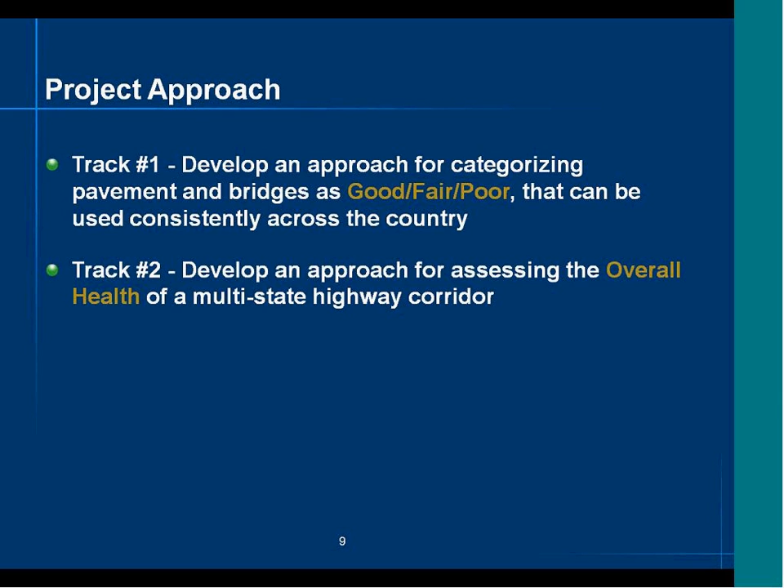Phases of the project. The first one was a literature review and to develop a methodology. The second one, which you're going to hear more about from Jonathan in a minute, is we conducted a pilot of the methodology along a three-state corridor. And then, as Steve mentioned, we presented the findings and recommendations at a national workshop, and the final project documentation.

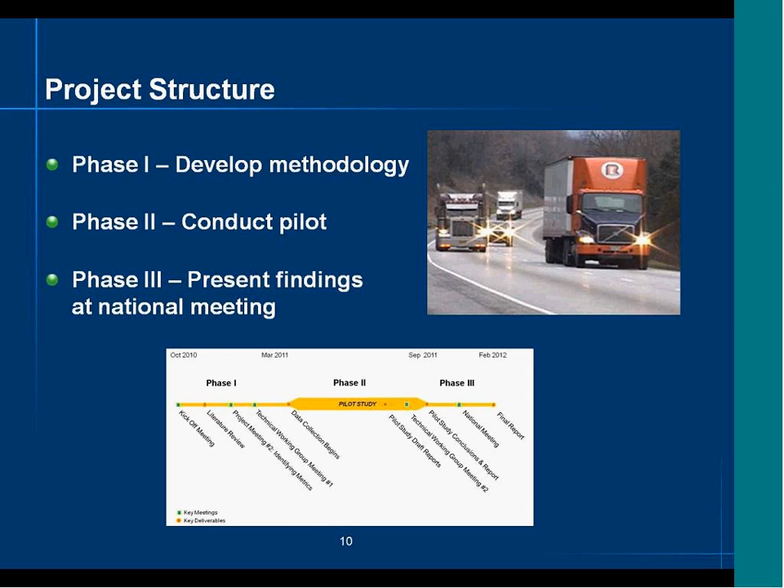With the project, we had a technical working group that met a few times and provided feedback and guidance to the work. We had representatives from a number of DOTs and AASHTO. And at the national meeting, which was held at the AASHTO annual meeting in Detroit last year, there were about 33 state DOTs there in addition to FHWA and AASHTO. Later on, we'll give you the documentation for this project, and on FHWA's website you can find the proceedings from that national meeting.

Track number one was to define qualitative definitions for good, fair, poor. So let's start by just describing in words what we mean by good, fair, and poor. And the second step was, after we had those definitions, let's develop performance measures that we can use to place the pavements and the bridges into those buckets.

There are a couple major benefits of this approach. One of them is, if you're just talking about three big buckets, good, fair, and poor, it helps to alleviate some of the concerns and discrepancies in how data is collected, compiled, analyzed, etc. A good pavement should be a good pavement, regardless of some inconsistencies in how some of the data items are collected.

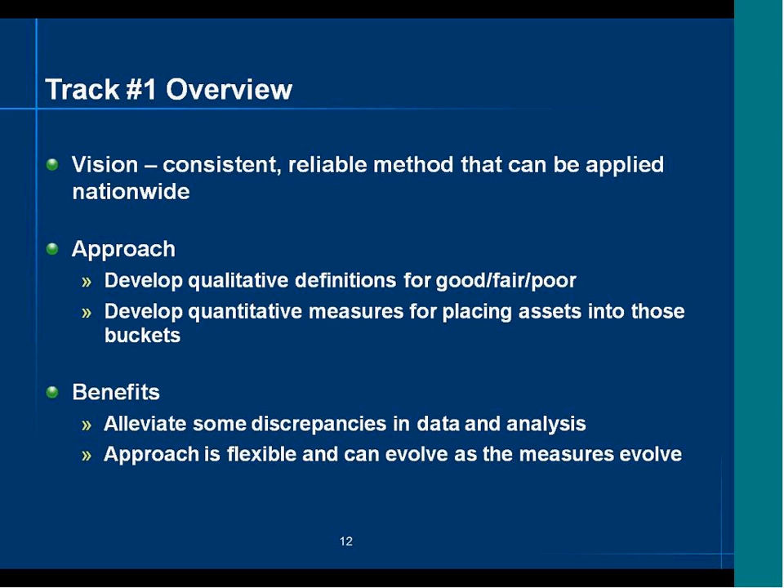So the table shows you the results of that step. This is basically, in words, what we mean by good, fair, and poor condition. There's 2 columns. One of them just talks about what the physical condition looks like. And so, for example, a good pavement is free of significant defects. And then the second column talks about what type of work is generally required for an asset in that condition.

I'll give you a minute to read through some of this, but it's important to remember that the audience for this table is us. It's technical transportation practitioners. There's been an understanding that if we are going to start to communicate this to the public or to elected officials, then we would need to revisit these definitions and seek more in terms that they can easily relate to.

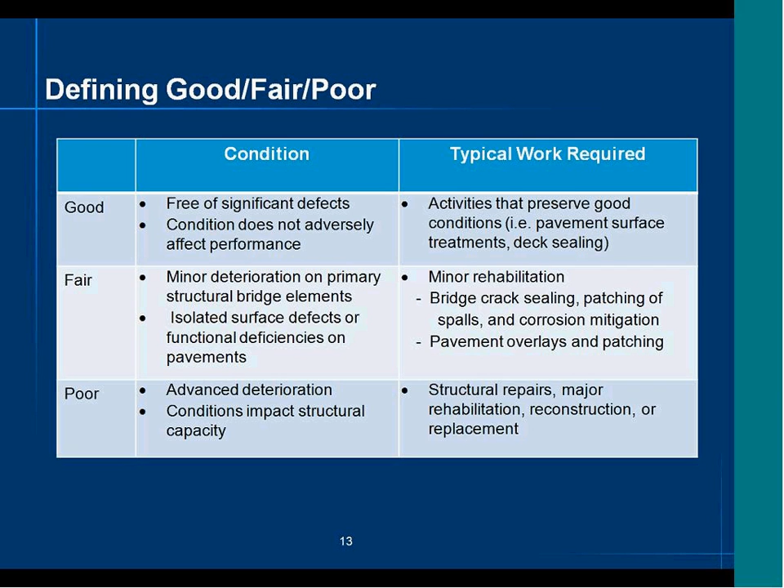So the next step then, once we have these categories defined, was to look at measures for evaluating the assets and putting them into these categories. For that, we built on some work that was being done by AASHTO. And AASHTO also was looking at measures that could potentially be used for national implementation. They were evaluating them in terms of their readiness. How ready were they for implementation? And so they came up with these three questions.

Is there consensus on the definition of it? Is there an approach to data collection? And has there been some national comparative analysis done to look at the consistency of the data across states? And if there was yes to all of these, then it was categorized as a Tier 1 measure. And so if you meet these criteria, then it's ready for national implementation.

On this table you see the goal area. Again, today we're just focused on pavement. We have a similar table for bridge, but on pavement the first table is the measures that were addressed through NCHRP project 20-24(37G) that was conducted by AASHTO through NCHRP, and that looked at two measures, IRI as a Tier 1, and then a measure of structural adequacy based on HPMS distress data.

The idea behind that research is to define the details for using IRI, and then to define an approach for advancing that Tier 2 measure. So eventually, someday, it could go into the Tier 1 category.

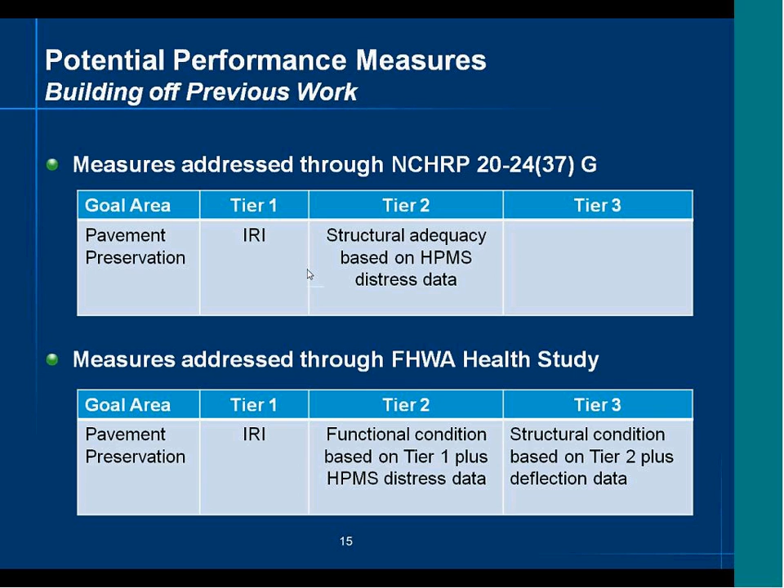So that was all track 1. Track 2 now looks at the health assessment. And remember, in this context, health goes beyond the physical condition of the assets. The analogy that we used a lot was you go to the doctor and you ask the doctor, what's my overall health? And so they take your blood pressure, they ask you your age, your weight, et cetera, take some other tests, and the result of that is an overall assessment of how healthy you are.

What you don't get out of that is a single number. On a 100-point scale, the doctor doesn't say, well, you're about 82, or you're a 93, or whatever the case is. So there's no single algorithm that crunches these numbers, combines them together, and gives you a single score. Rather, the idea is let's provide the information to decision makers in a way that enables them to apply their judgment to it and make their own assessment of what the overall health of a corridor is.

And from the data perspective, we wanted to try to do that with data that's currently available. And then as the discussions went along, we tried to understand, in an ideal world, if you're trying to evaluate, assess, and communicate the overall health of a corridor, what would you like to see? And in those cases, we flagged some future enhancements in terms of data that we'd really like to see, but is not currently available.

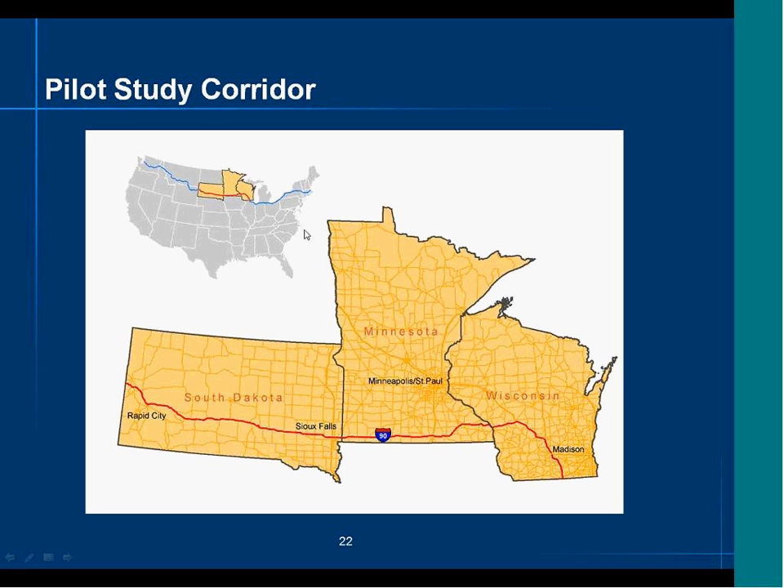The corridor that we selected was I-90 through South Dakota, Minnesota, and Wisconsin. Pretty much smack dab in the middle of the country there. You can see the graphic on the left-hand side where this occurs in the country. It consists of about 874 centerline miles, about 411 in South Dakota, and the remaining mileage in Minnesota and Wisconsin. The range of pavement types is on the right-hand side. 19% of the pavements were AC surfaced, or plain asphalt concrete pavements. 25% were composite, and then the remainder were Portland cement concrete pavements of one flavor or another. ADT ranged from 5,000 per day to 90,000 per day, so we had some rural and urban interstate. So pretty much a wide variety of traffic levels, urban and rural conditions, and pavement types in this study.

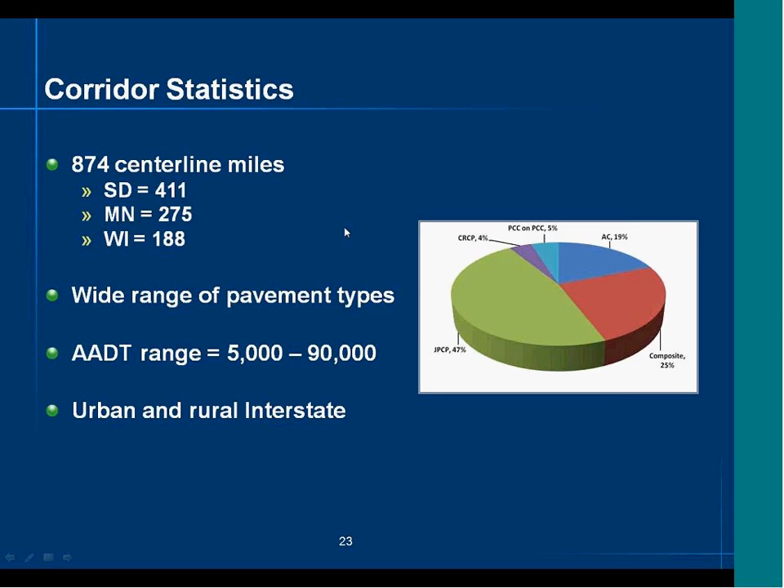So national data gathering, we basically just collected HPMS data from FHWA, and then for the states, we put a pretty heavy load on the state DOTs, and we do acknowledge the help of Minnesota, South Dakota, and Wisconsin in helping us gather this data. It was in a time where the states are really busy, so we really appreciate their input.

The things we requested were documentation. We wanted to know what kind of data they collected, how they used the data, what their data collection protocols were, a whole slew of documentation. We requested inventory data, and the gist of it was pavement management data, and we were looking for structure, M&R history and cost, IRI, rutting, faulting, condition indicator, composite condition indicators that they use. For example, Minnesota uses a PQI, pavement quality index, a mashup of cracking and rutting and ride.

So traffic data. And the reason structure and M&R history and cost is in red is we found that was fairly difficult for the states to help with. They had some, but we found a little bit of problem getting data in those areas.

For collection, as I mentioned, the project team used a vendor, Mandli Communications, for the pavement data collection. The things we collected there were right-of-way imagery, rutting, faulting, distress. Again, a complementary data set to what we received from HPMS and the states. So we processed the data according to HPMS 2010 standards for the entire corridor. We also did a PCI survey, or Pavement Condition Index survey, using ASTM D6433 on about 150 miles of the corridor to see what that told us. And it was conducted in the summer of 2011, so last year.

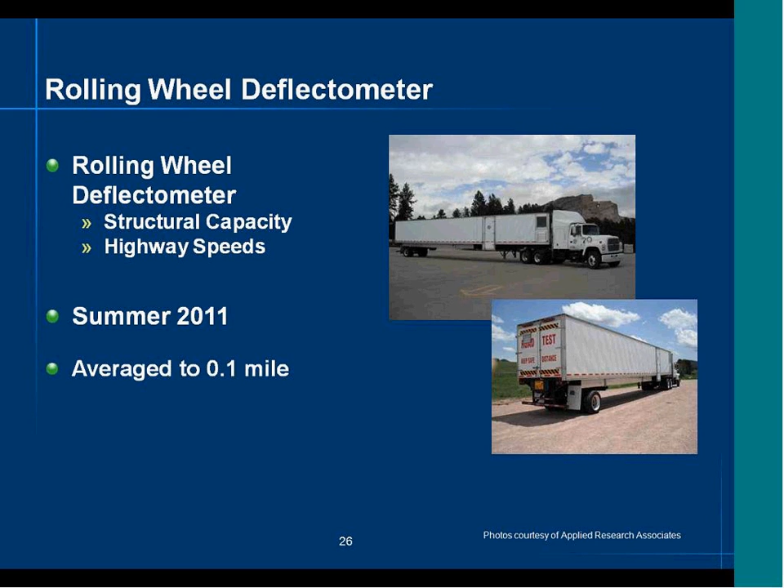With all this data, we took a look at the temporal consistency, or what time periods the data came from. The HPMS data came from 2 different years for the 3 states, but eventually we were able to get complete data sets from 2009 and 2010 for all 3 states. The PMS data represented conditions in 2010, and the field data collection represents conditions in 2011.

We have a note here about the RWD results. The RWD requires pavement structure to do its calculations, and Wisconsin didn't have that information. So the data you see here for the RWD does not include Wisconsin. You'll see a no data part of the pie chart later on.

So what are the detailed questions we were asking ourselves, and Federal Highway was asking us? We wanted to know how difficult it was to obtain each data set. We wanted to know if the data was all from the same time period, which I mentioned a second ago. We wanted to see how consistent or complete the data collection between the pilot study states was. And we wanted to know if the federal, state, and project team data was of similar quality. We also looked at how the various data sets compare.

We also wanted to know which data set has potential for use in a national condition metric. Could we use pavement management data from the states? Do we need to use HPMS data from Federal Highway? Do we need to go out and collect data on the interstates? That was one of the key questions.

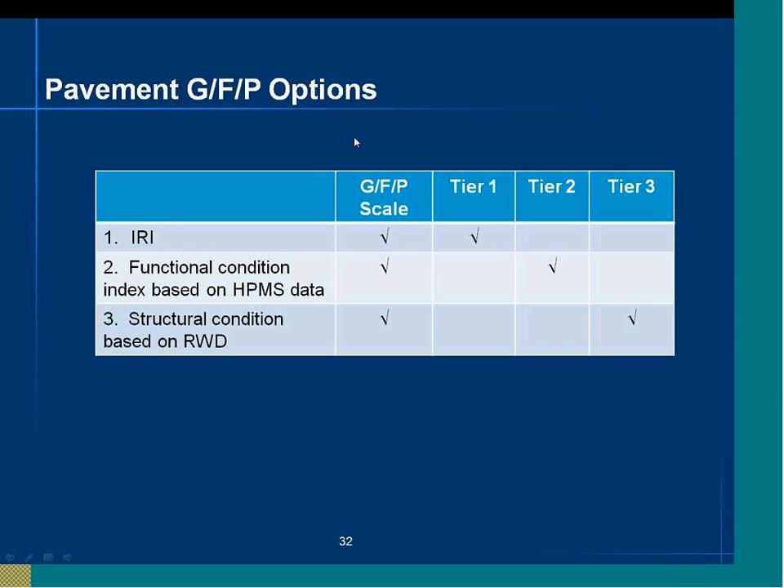To refresh our memories, the pavement good, fair, and poor options that we were looking at were IRI, the functional index based on HPMS data, which is the Tier 2, and structural condition based on RWD, matched up with the Tier 1 and Tier 2 numbers eventually, but we looked at it separately for this study. Each of these in turn.

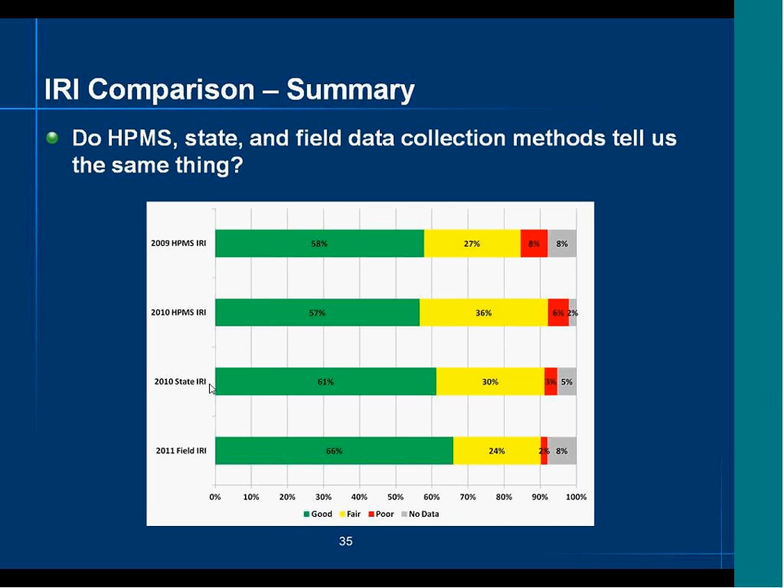Some of our observations were that IRI from all the data sets are fairly well correlated, and theoretically any of the data sets could yield a good, fair, and poor. Also, the differences we observed between the data sets were in the realm of what happens when you have different equipment, different years, over a series of years. So considering those factors, we felt that was a pretty good correlation there.

Moving to Tier 2 measures, the functional condition index. We had IRI, cracking, faulting, and rutting. And to do the comparisons, we had to get all the data into the same framework. And so we used the HPMS data set framework as our comparison mechanism.

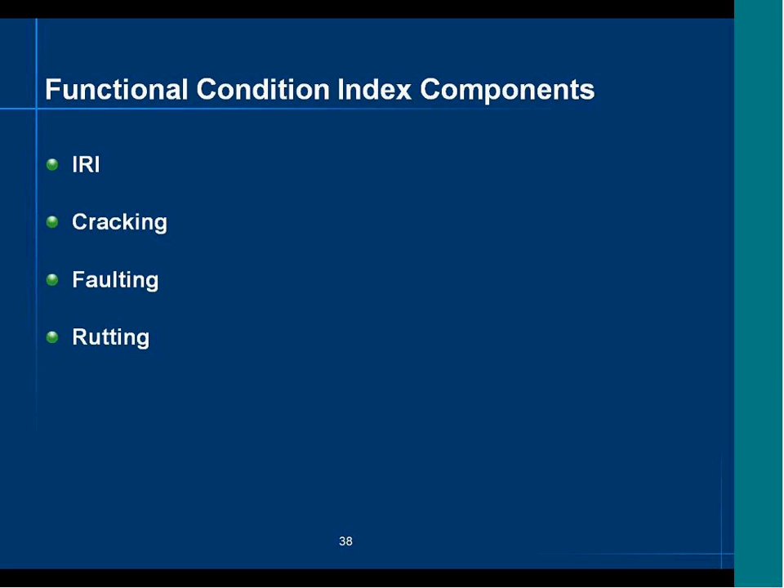When we look at cracking length for asphalt, the bottom is our field data collection length in feet per mile, and on the left-hand side we have HPMS data. For this particular set of slides, we couldn't use state PMS data because we couldn't translate that into HPMS data for a number of reasons. So we're just looking at HPMS data and our field data.

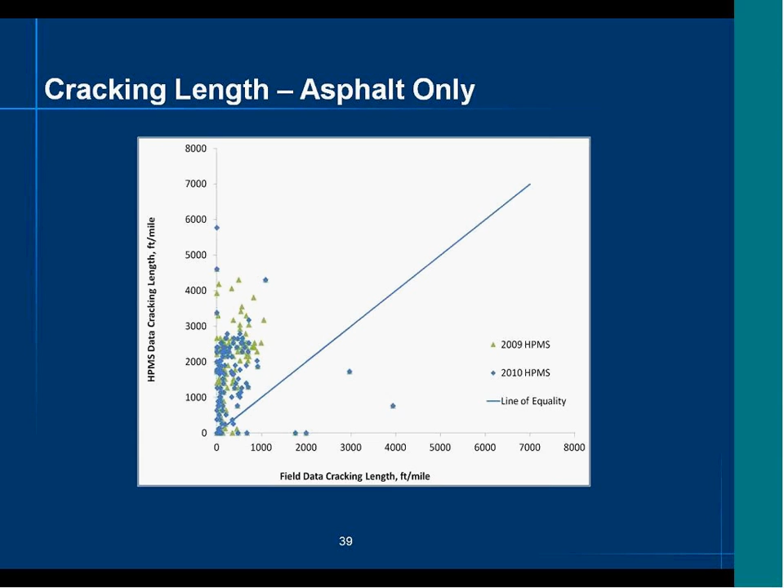So if you look at the slide, there is much more cracking in HPMS than we found in our field survey. So the data did not correlate very well. In 2009 and 2010 HPMS, we had some decent grouping of data, but we looked at the data and did not find very good correlation.

When we look at percent cracking, again, we have field on the bottom and HPMS on the left-hand side of these graphs. When you look at asphalt, there's no correlation there at all. This data is pretty poor in terms of matching each data set. For concrete, we found a little better correlation, but as you can see, it's spread out pretty good. It doesn't look as good as the IRI data, but in the whole scheme of things, it wasn't so bad. And again, this is just percent cracking in the HPMS context.

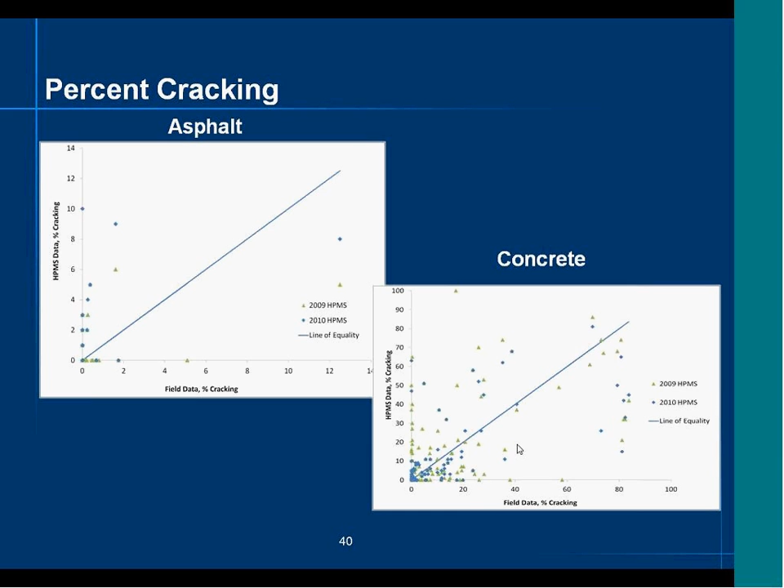Rutting looks very similar to IRI. The data is grouped together pretty well. It has a good correlation among the group, but there's an offset there, about a 0.15 inch offset, and we've started another study to look into that offset and see why that was. But this data has some promise. At least it correlates pretty well. There's just a shift there in the data.

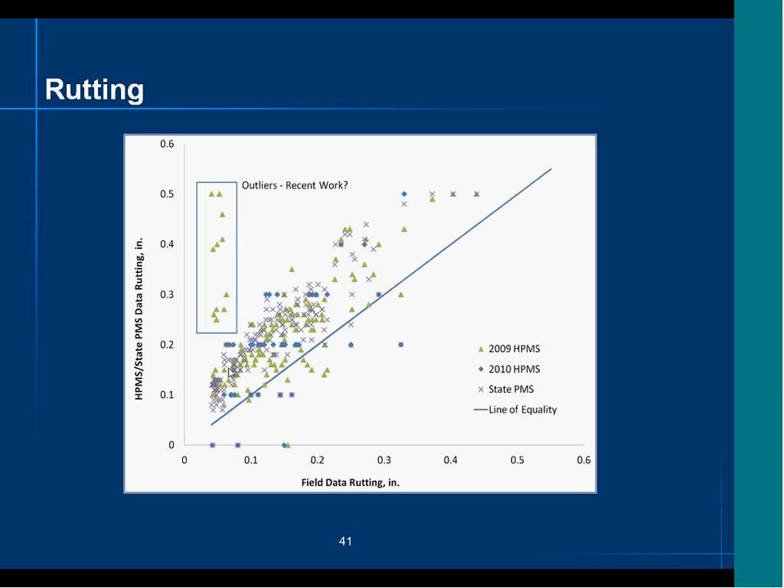We took all this data and we developed a functional condition index based on the results of the road trip along I-90. We took that condition data that we gathered in the field, the engineer-rated pavement sections, and we created an equation that calibrated the data from the study to those condition ratings. We mashed up IRI, cracking, rutting, and faulting into this functional condition index. Now, we have some problems, but we did it just as an exercise to see what we could see. We did that using these 3 data sets.

We found fairly wide variation between the HPMS data sets and the field data sets, with a lot of data in poor condition for HPMS and not so much in the field, and more good in the field than in HPMS. So this is just a little prototype to see what we could get out of trying to come up with a functional condition index. This functional condition index is a long equation for asphalt, jointed concrete, and CRC that's included in our report, which we'll have the reference for at the end, to see how we developed it.

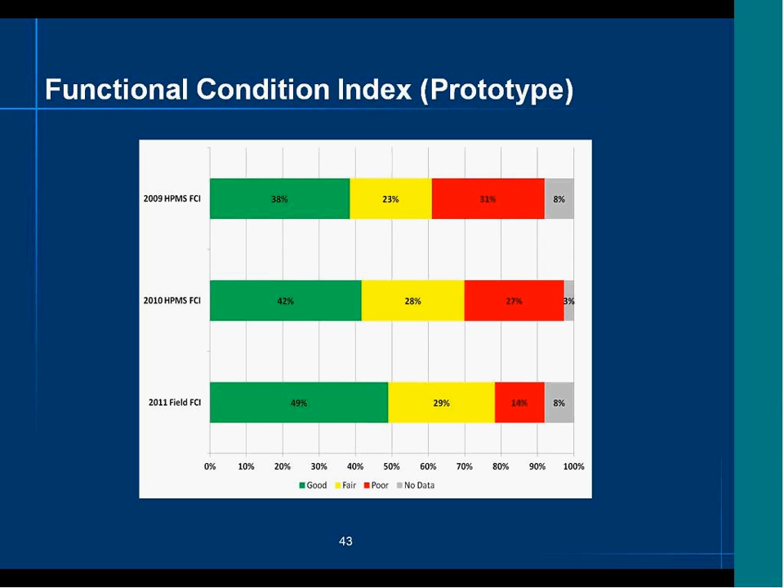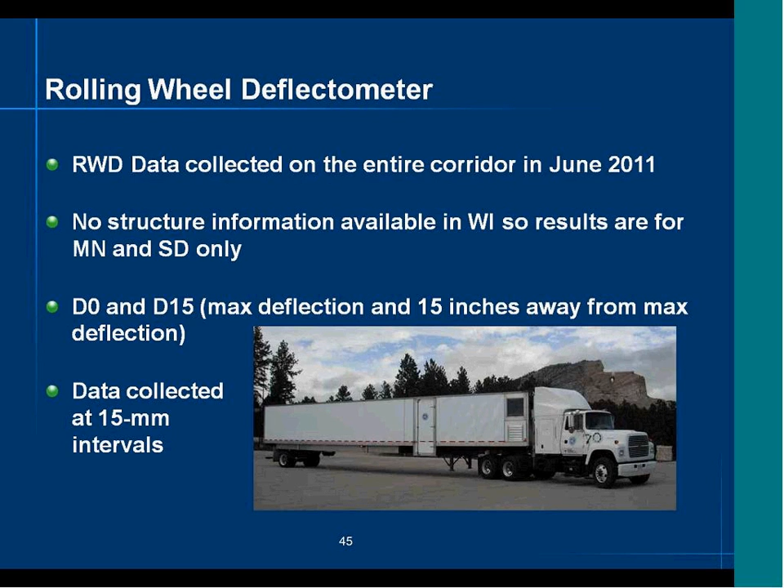Objective 3 was advancing a Tier 3 measure, and we wanted to begin to define the structural condition index. RWD was used on the entire corridor, and since we don't have Wisconsin data, we don't have results for Wisconsin. RWD uses a sensor that measures the D0, which is the max deflection under the rear wheel, and a D15, which is the deflection 15 inches away from the maximum deflection D0, collected at 15-mm intervals.

There's no industry accepted method for using RWD to assign condition. We did a literature search to see what states had done, and we ended up selecting a study from Indiana to use just to get good, fair, and poor. That Indiana study used a D0 of less than 6 as good, D0 from 6 to 10 as fair, and D0 greater than 10 as poor.

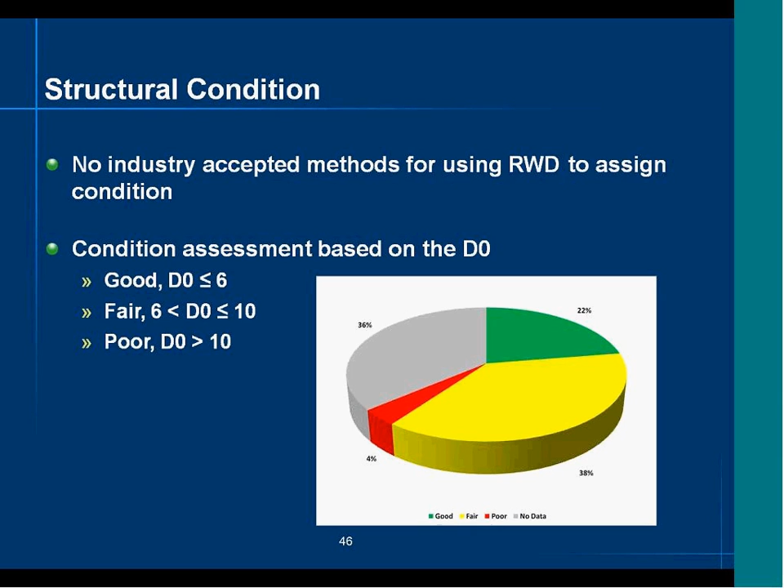And you can see in this good, fair, and poor graph that it slots a lot of the pavements in the fair condition, 22% in good, and not many poor, which is kind of reasonable given it's an interstate pavement with a strong structure. So it was fairly reasonable results, but in our recommendations later, we'll tell you what we think needs to be done with the RWD to make it more robust.

Doing that, we decided, okay, let's look at IRI. Since we know IRI looks pretty good, IRI, and then let's look at results we achieved from the RWD and see how they compare. This graph is very similar to the other scatter plots we've been showing. For example, if this was well-correlated data, if IRI matched structural, those balls would be about the same size in the good, fair, and poor category. So diagonally across this matrix, they'd all be about the same size.

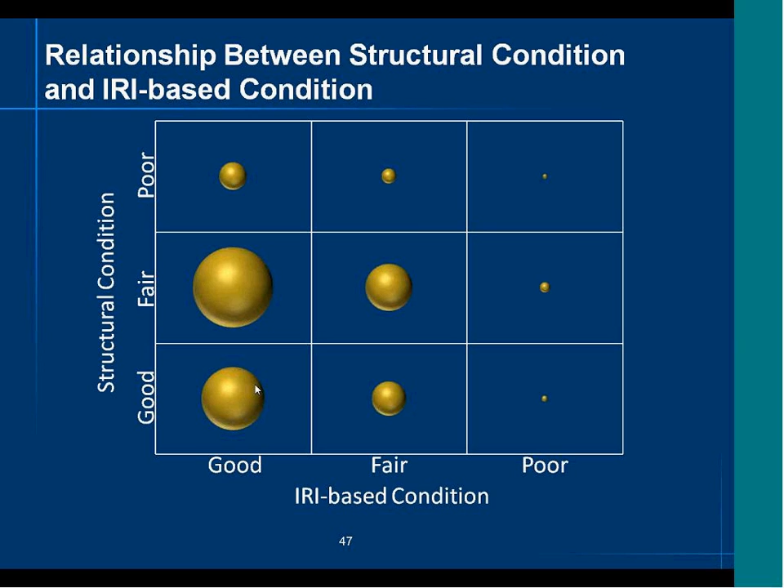And what we're seeing here is that the IRI versus structural condition paints a more optimistic picture of the condition of the pavement surface. And it's been recently concluded from another Federal Highway study that looked at IRI and structural condition. So, a general observation here is IRI paints a healthier picture than if you looked at structural condition for the interstate system. So, just an observation, we didn't do a whole lot more with that. We just wanted to see what we could see by doing that. And a fairly interesting outcome.

While we advanced, we also looked at remaining service life, since a lot of states are looking at this or do use this in their pavement management systems. And to do that, we used the Pavement Health Track tool, which I'm sure many of you are familiar with. If you're not familiar with it, the Office of Asset Management has a web page devoted to it. You can download it and look at the technical specs and all that.

When we used the PHT tool with HPMS data and our field data, we painted a very, very conservative picture of this particular corridor. And we looked at it in some detail and found, for example, the PHT looks at the age of the pavement as a critical condition indicator. And a lot of pavements were very, very old, and so it was saying it was failed when it necessarily wasn't failed. But the bottom line is the PHT tool painted a very conservative picture. We made recommendations to Federal Highway, and they're currently following up with that contractor to look at the PHT and see how it can be improved.

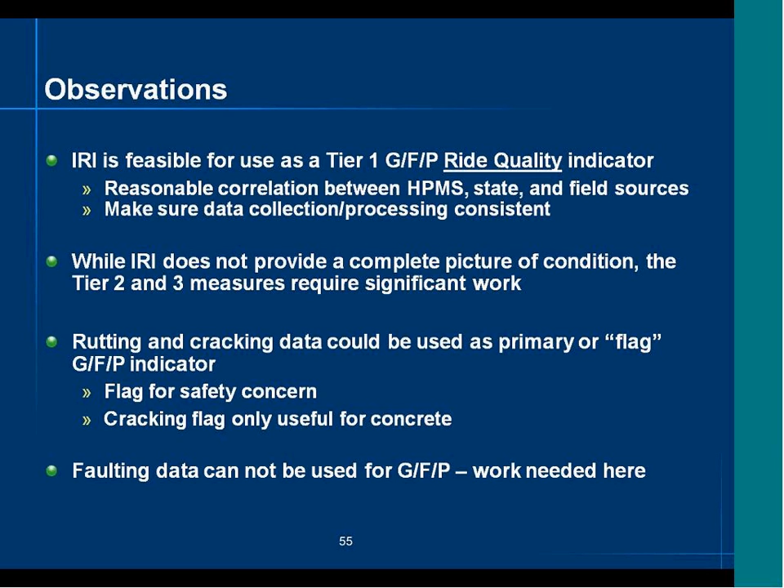We mentioned that rutting and cracking data could be used as a primary, or as a flag good, fair, and poor indicator. For rutting, you could just flag segments that were over a quarter inch or a third of an inch of rutting for a safety concern in the health tool. And for concrete, you may be able to use the concrete percent cracking as a flag to say, hey, the IRI looks good, but you may need to look at this for cracking. So a couple things we can use. And faulting data cannot be used for good, fair, or poor. A lot needed there.

That's basically the result of our study in a nutshell, and the report gives a lot more explanation about all these things and shows how we came to all our conclusions. But what we'll do now is, before we go to the phones, I'll scroll through my chat box here and see if there's any questions. Well, why don't we open it up, and while you're opening that up, I'll go through the questions and see if there's questions from the audience.

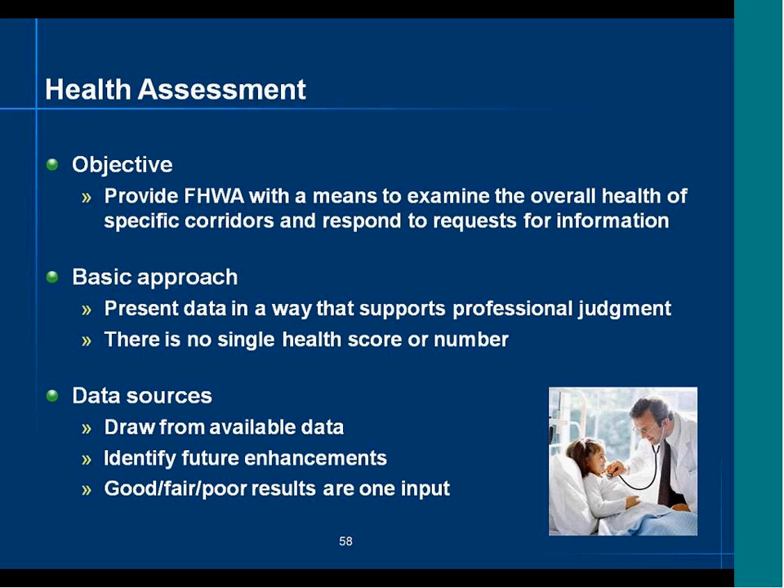One of the other analogies that we've been using is the sports page. There's a lot of things there, and if you're not familiar with it, it can be overwhelming. You don't quite understand what's going on. It takes you a while to get into the details, but then that's constant. So every day, once you get the hang of it, you can pretty quickly open it up and get a sense for what's going on. So keep in mind there's quite a bit jammed into the following pages. A couple things to look for throughout.

We used a red, yellow, green model. Throughout the report, you'll see these indicators, and the idea is that it's just a very quick summary. If you're looking at a report and you see a bunch of green, then you can have some confidence that things are okay. If there's some yellow or red popping up, it draws the user's eye to them and encourages them to drill down into more information. All of these traffic signal indicators are based on fixed thresholds. The data gets cranked through all of these thresholds, and the lights turn on automatically.

In addition to that, you'll see in some of the screens little flags. If something is flagged, it will turn red. So it's right there, a red flag. Take a look at what's going on there. Again, it encourages the user to focus on that piece of information and drill into more detail. For example, if more than 5% of a corridor has an IRI above an extreme value, it would get what we called an extreme value flag, and it would tell you why the flag was there.

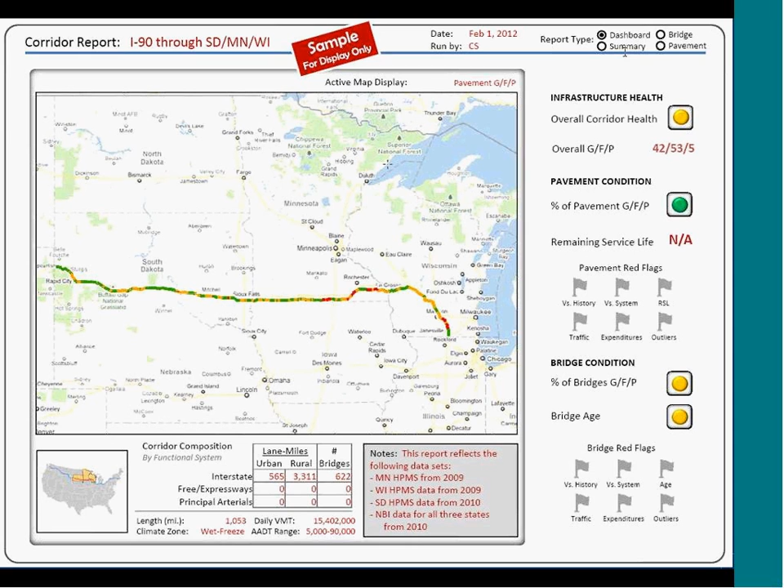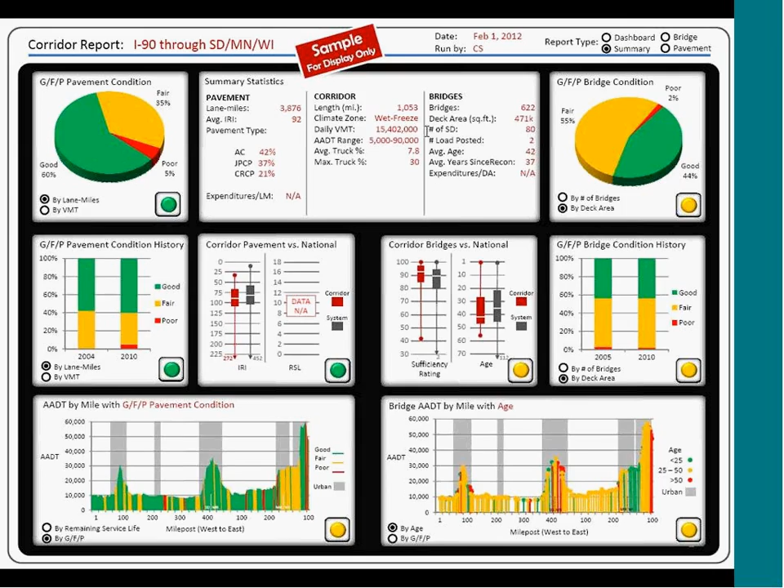So the equivalent of everything I just described on the left-hand side for pavement is you'll see the equivalent of that for bridges. Same graphs, but they're focused on the good, fair, and poor, the sufficiency rating, and the age. Now, then there's one more level of detail. This is number 2. One more level of detail is on the next page, and this page is just for bridges. I have a very similar sheet on the next slide that's just for pavements.

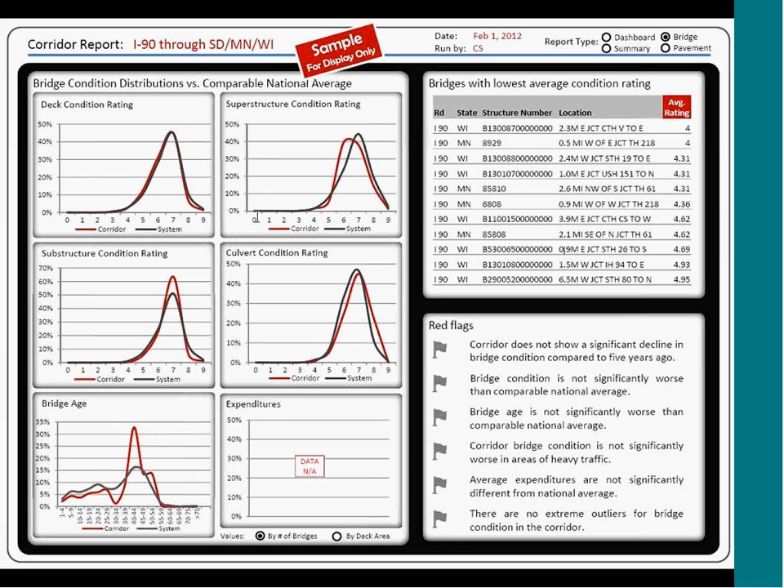So that's a quick demo of the health report that was developed as part of this project.

I don't see any chat discussions, but please let me know. And then otherwise, Karen, we're ready to take questions again. Okay, we do have a question from Andy Freeman. Please go ahead. Answered our question for us. Thanks.